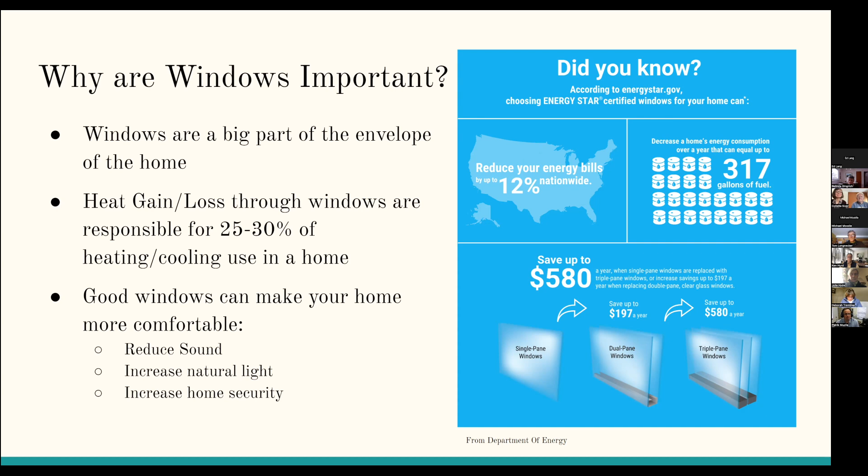There are a couple metrics. So how do we know a window is good? The two major metrics that we look at with a window are the U value and the solar heat gain coefficient. So let me talk about the U value. You must have heard about this before, but let me just reiterate it. The U value really measures the resistance of a barrier, in this particular case a window, at moving heat energy from one side to the other. In this particular case, we're mostly concerned with moving the heat during the heating season to the exterior.

But this also has an impact in a cooling season, where the heat from the outside is trying to get back to the interior of the building. In northern climates, based on the Energy Star rating, the guidance we have is that a window should have at least a 0.30 U value.

In our company, 0.30 U value is not a great U value. We are really thinking about windows at being 0.2 and better. And this is one of the main distinctions between the North American window market and the European window market. Here in the US, we're still trying to get our windows below the 0.30 mark. In Europe, almost everybody operates at the 0.20 or better performance mark.

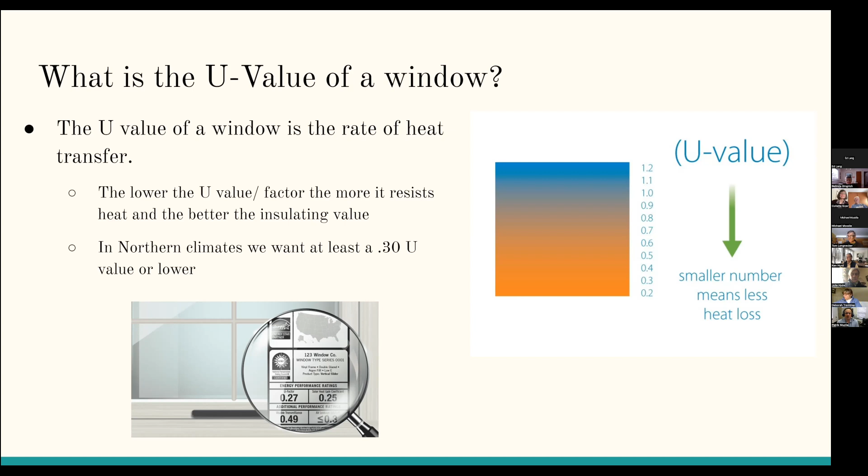So when you guys are looking at new windows or the windows that you have right now, U value is one of the metrics that you're looking at. The second metric is a solar heat gain coefficient. Now, this is a measure of the amount of solar radiation that passes through the window and transfers energy into the home. Now, here in New England, during the fall, winter, and spring, solar heat gain is a friend, because this is the additional heat that we're getting into our homes for free from the solar radiation out there.

And you have all felt this. You have a room probably in your home with a large southern facing window, and you can physically feel how much energy can come through this window even on a very cold winter day, when the sun is shining just at the right angle and going through this window.

Solar heat gain coefficient is an enemy or a problem in August, right? Because that's the month where we're trying to cool our homes, and the solar heat gain that comes through the windows is the additional heat that we're trying to get rid of, trying to cool that space to a comfortable temperature range. And so solar heat gain coefficient is a little bit more of a complicated measure than the U value. The U value is very straightforward. Buy the windows with the lowest U value that you can afford and fits your design.

With solar heat gain coefficient, we really want to consider the design of the home, orientation of the home, the amount of glass, amount of shading, for instance. So a deciduous oak tree will reduce solar heat gain in the summer because it's filtering the sunlight that's hitting the building. When those leaves fall down and the sun is coming through those branches and into your room in the winter, that's a pretty good solar heat gain coefficient control device. Trees, right, which we have a lot of here in Lincoln.

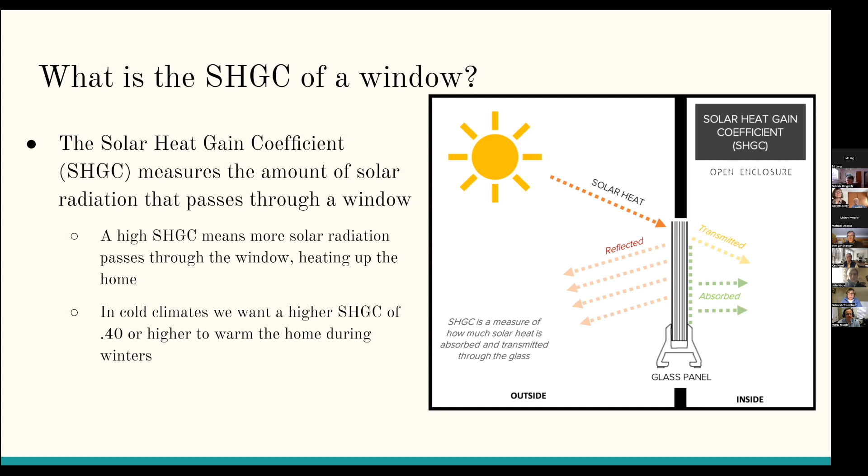Let's have a look at how a window is constructed. The part that we look through, the glass, is pretty straightforward. This is the part that used to be in the past the most vulnerable part of the window for energy transfer, and we have really come a long way. The triple pane glass available today on the market is argon filled and provides energy efficiency which is currently better than the energy efficiency of the frame of the window. So we have gotten to a point where the glass is so good that the energy efficiency of the glass is better than the frame.

And the energy efficiency of the glass in many instances, I believe, is better than some of the old walls we have in Lincoln, right? So even when we have a 2x4 wall with some amount of insulation in it, modern triple pane glass today is already performing better than some of these existing envelopes that we have.

So the frame is the rest of the window. The frame has two factors that impact the energy performance. One is the actual energy coming through the frame. So how much of the heat is moving through the frame itself. Windows which are made of metal are particularly punishing.

So if you have one of these contemporary homes in Lincoln and you happen to have steel frames or thermally not broken aluminum frames, you can just feel how much energy is coming through it. You're looking at that frame today, and you're probably seeing frost on it. You may be seeing condensation on it, and its surface temperature is probably somewhere in the 40s and 50s. This is energy that you're losing through the frame of the window.

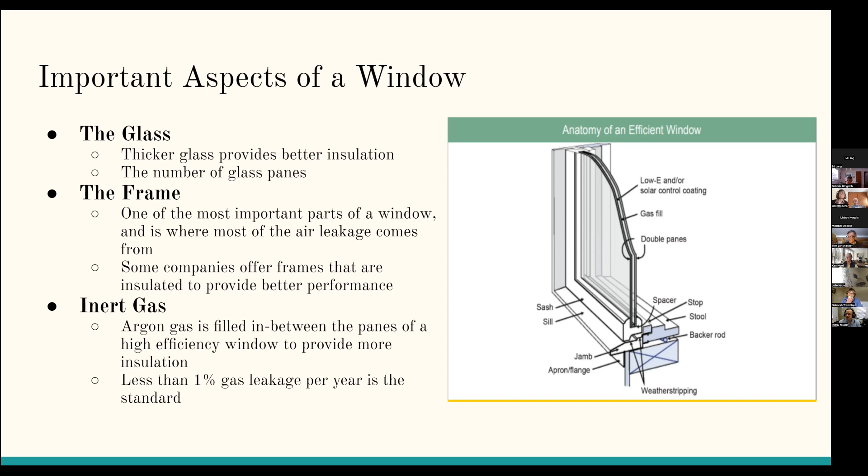And the second factor is we want to keep the argon in the glass, right? And this is an issue of the quality of the glass. How long is the argon going to stay in the glass? How many years is it going to take for the argon to leak out of the cavity, which is a big factor of the quality of the window that we're looking at.

Let's talk about triple pane windows versus single pane and double pane windows. The cross-sectional drawing right in here gives you an idea of what we're talking about. I'm not going to spend an enormous amount of time here. Single pane windows are a complete disaster in terms of energy performance. It's on a factor of 10 worse in preventing energy transfer than a triple pane glass. Double pane glass is hopefully what we are mostly seeing in Lincoln homes right now, because a lot of the windows got replaced with different quality of double pane glass.

And triple pane glass is really the new technology coming in the last, I would say 8 to 10 years. Used to be really unusual, really expensive. It is now becoming mainstream in both residential construction and a requirement in a lot of multi-unit construction in neighborhoods that require stretch code energy requirements. So for instance, if you're building an apartment building in Cambridge, you are most probably going to have to use triple pane windows to build that building. And we're seeing that on almost every project that comes up in the last few years.

Some of the numbers here, the efficiency of the windows, single pane to triple pane, you were looking at 50%, in many instances even greater than that in terms of the energy efficiency. The dollar figure on annual energy savings is a little tricky here. I mean, we see in the slide here, $71 to $501 annual on household energy bills. If you have a Bauhaus contemporary home with a fair amount of glass in it, the windows have just an enormous impact on the economics of heating and cooling of that home. And of course, we have better sound attenuation and safety with the windows, particularly if we have double pane or triple pane windows.

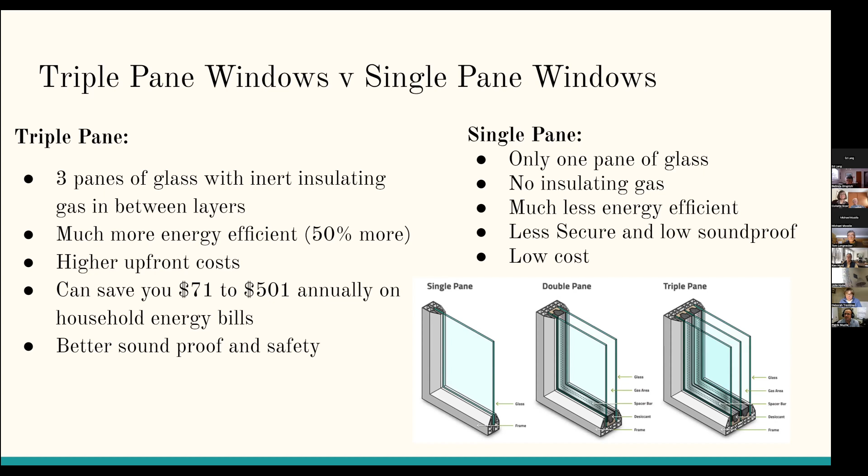That's almost a given. Windows which have poor airtightness, so are leaky, and you know which these windows are. You walk by a window and you see the draft coming through. This is definitely a candidate for replacement. There are some short-term remedies you can do in terms of improving the air sealing of windows. There's a lot of people going around with caulking guns, with adhesive tapes. Home Depot has a whole section in the fall on improving airtightness of leaky windows.

And this is something that I definitely recommend doing, because it's something you can do right away, something that costs 1% of the cost of replacement of the windows, and something that can have a really huge impact on the air changes per hour. That's the measure that we have in homes. How many times does this home leak the entire volume of the air to the outside?

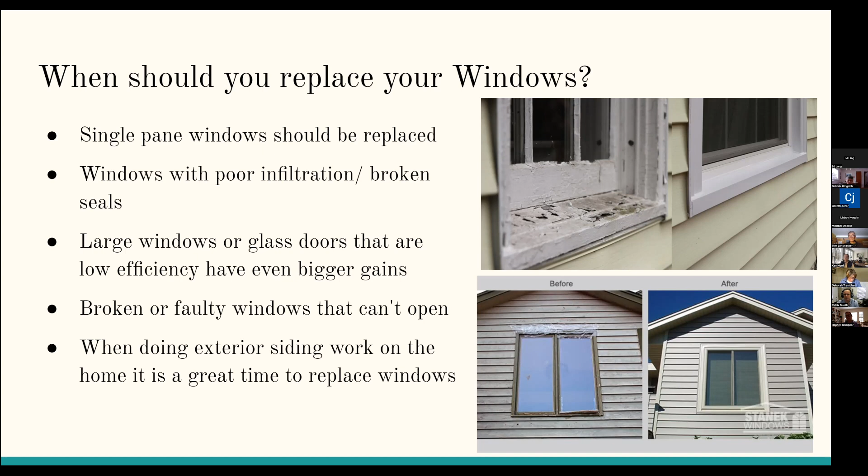Choosing your windows. So the federal government has given us some guidelines on how to choose windows. We looked at the U value and the solar heat gain coefficient. And the Department of Energy came up with the energy efficiency standard through the Energy Star program. This is a prescriptive set of guidelines which divides the country into a series of regions: northern, north central, south central, and southern. And they essentially give homeowners guidance on which benchmarks you should be hitting with the U value and the solar heat gain coefficient. Now, here in New England, it's pretty straightforward. U factor as low as possible.

They're asking us to go below 0.30. And solar heat gain coefficient, we actually benefit from relatively high solar heat gain coefficient. So they're not giving us a guidance on bringing our solar coefficient down.

If you are in Texas or Florida, the solar heat gain coefficient is a huge factor, because in those climates you worry about your cooling cost more than your heating cost. And so in those climates, they actually ask you to keep the solar heat gain coefficient under 0.30 or 0.27, and they allow you an almost criminal U value of 0.60, which it's kind of getting difficult to buy a window with this kind of performance. But it's still on the Energy Star

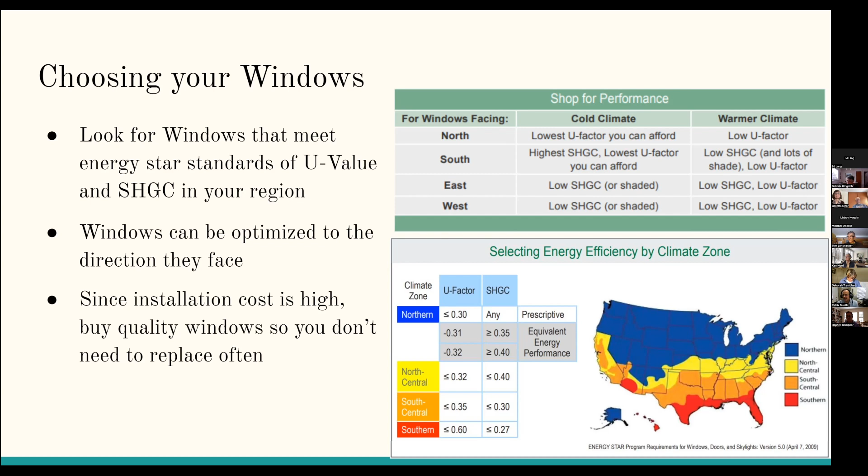But I have to mention Energy Star because it is still the primary guidance for code compliance. It's a primary guidance for subsidies in the United States as well. So it's just something we have to keep an eye on. But I would hope that people would look further beyond Energy Star. Energy Star is getting revised this year as well, so they're tightening some of these performance metrics, but just small decimal points. But we're still kind of running about a decade behind of what the Europeans think we should be prescribing.

I'll mention incentives for window replacements. MassSave has a number of energy saving programs. They change all the time. So I always encourage you to go to the website and look at what the current incentives are. They give incentives of $75 per window if we're replacing a single pane window with a window that's at least Energy Star compliant. And they also offer 0 interest 7-year loans, which are a really tangible help when making a major investment replacing windows.

The other incentive that I haven't mentioned is there are also tax credits available from the federal government for energy improvements. Again, they change quite a bit. I know that they changed with the new act that was enacted last year, which made huge changes to electric vehicles, tax credits for energy efficiency improvements. So I would consult an expert, hopefully a tax advisor, to see what those options are. But some of them are really substantial. You're looking at 30% tax credits for some of these improvements, which is a major saving.

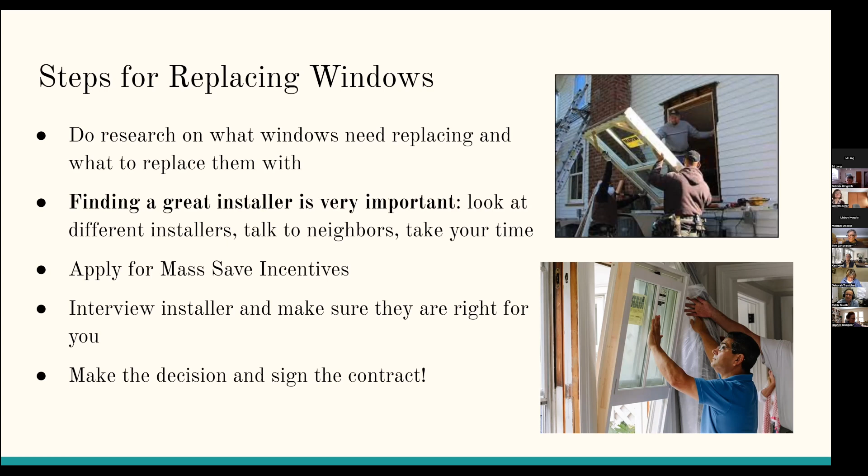Make a decision and sign the contracts. Read the reviews, and mostly ask them about the projects they worked on. Some of the other things to keep in mind. So I already mentioned that the proper installation is crucial when installing a high quality window.

We talked a little bit about the siding and exterior cladding work. Absolutely, doing the windows together with the siding, those are the two jobs you want to be doing together.

Don't sacrifice window quality. The amazing thing is that what I see in the marketplace, especially on the commercial side, but it comes to the residential side as well, paying a lot of money for a window does not necessarily mean you're getting a really high quality window in terms of energy performance. It doesn't make sense, right? But there's a lot of pretty expensive windows which, in my opinion, do not have the energy performance that they should have with that kind of a price tag.

And so every time you're looking at a new window, look at those two metrics. The U value will speak for itself. If you're dealing with a vendor that's a U value in the 0.2 or better range, you're looking at a good window. Air infiltration is another value that you see on the sticker that comes with the windows. The lower the air infiltration value, the tighter the window is.

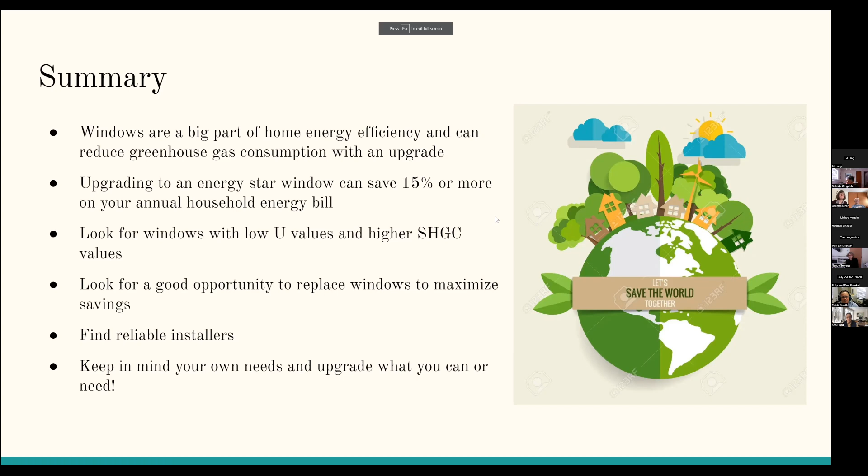Great. I just wanted to confirm for Ken Hurd, your windows' life expectancy is about 40 years? At least. At least, okay.

Ken Hurd also asked what your lead time is these days for getting windows in. It's amazing, because we used to be one of the slower vendors. We would make the windows relatively fast, but they had to travel across the ocean for about 4 weeks. We are currently one of the fastest custom window manufacturers in North America, because a lot of the other North American brands have gotten so backed up. I hear Marvin windows can be a 25-week lead time, and we're delivering windows at 12 to 14 weeks. So we're in a really unique period where, even though we come from far away, we can make windows faster than a lot of North American competitors. Yeah, it's amazing.